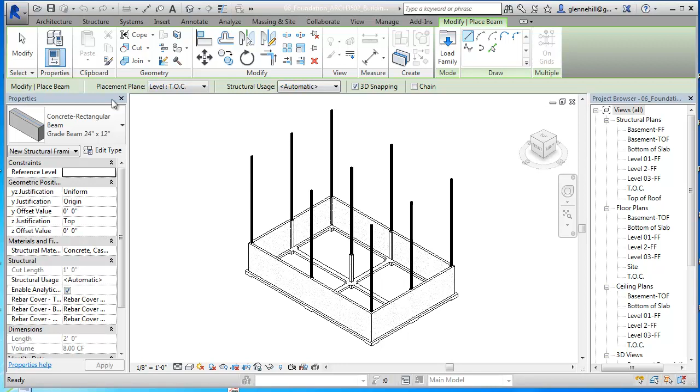To do that, we're going to go into structure. Once again, it's a simple beam, and we loaded down concrete beams earlier when we created our grade beam—there's two default beams in there, and actually 12 inches by 24 inches, that's probably adequate. We should go into Allen and Iano and check to see if the beam size matches what he would recommend, but we're going to take 12 by 24 and use that.

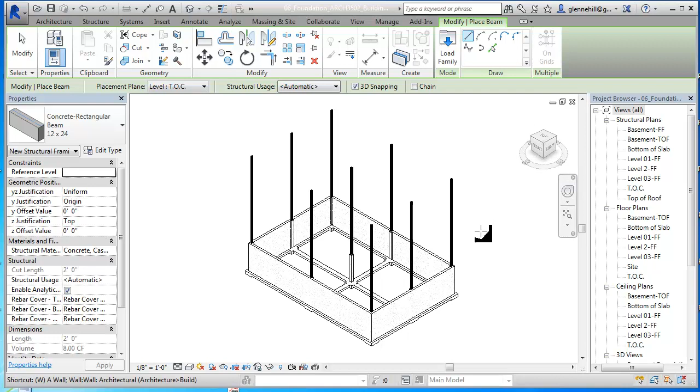Now let's WT this. Okay, I don't have any other views open. Since we're going to place the beams at the first floor level, I'm going to go into the structure, first floor, and we'll maximize this so we can zoom in. So here's the first floor. There's our grid lines, there's our walls. Okay, that works, and I think we're in good shape.

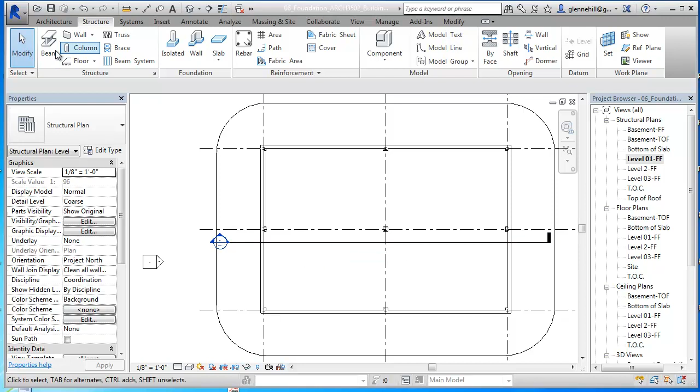So what we want to do now is put the beam in. We're going to click on beam and select that beam, and then we want to set the placement plane. We're going to set this not at finished floor of the first level, because we want it below the slab. So we're going to place it at... what would that be?

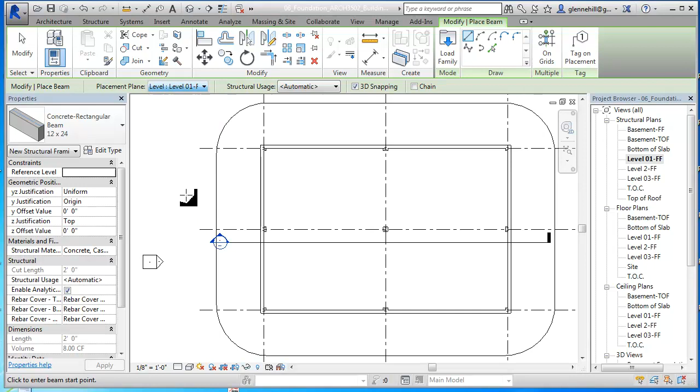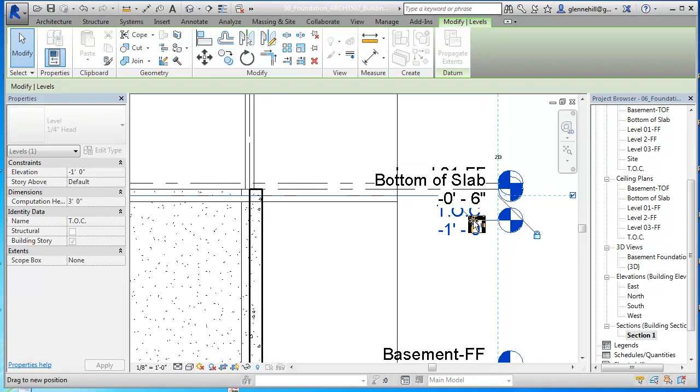I guess I better bring up a section. Hold on just a second so I can see. I'm going to close this out and bring up our section here so that we can see. So we want our beams, our slab—our labels are all messed up here, so I'm going to pull these down. So there's the top of the concrete, and there's the bottom of the slab, and that's what we want right there.

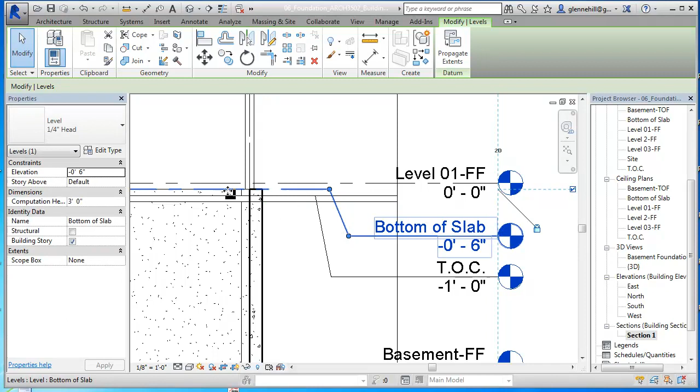So we want those concrete beams to go right there, to the bottom of the slab, right? And then right here you can see top of curb—I keep calling that top of column, but it's top of curb. And since I really don't want to see that, I'm going to go ahead and hide it, get it out of the way.

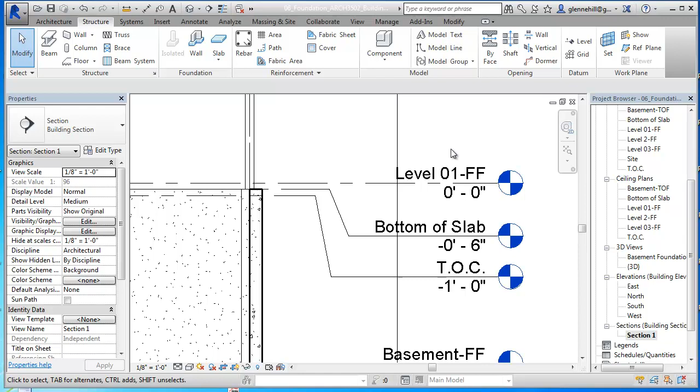That should work. So what we want is the beam to come right there, right to the bottom of what we put when we put the slab in. So that should work pretty well. So what we're going to do is WT out again, and we'll go over here, and I'm going to once again turn that off because it'll just get in the way, and we're ready to go.

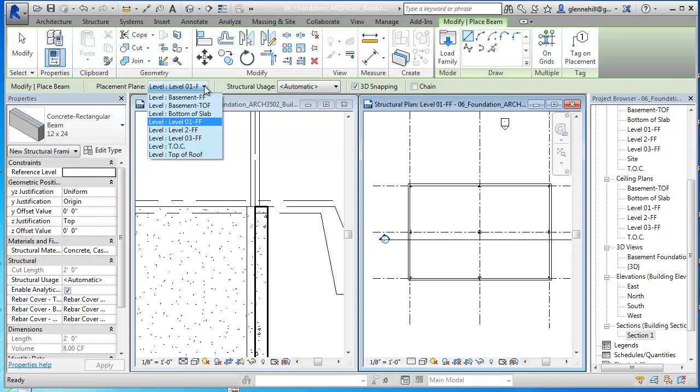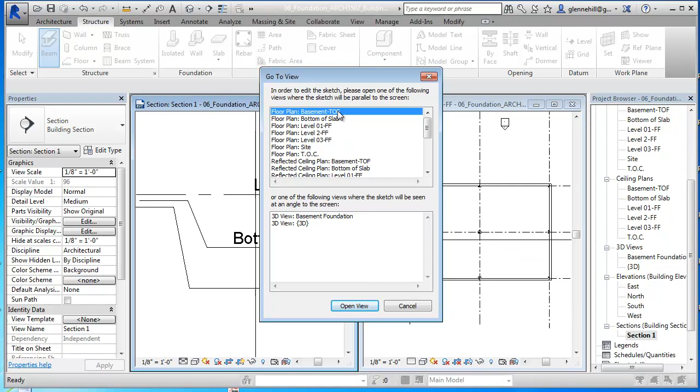So once again, back to beams, and we're going to set this to bottom of slab. Cancel out of that—beams, bottom of slab. There we go, so we're going to put that on the bottom of the slab. We'll say OK to that, in our finished floor view there. Wait, this should have been OK.

Let's cancel out of here. Let's get over here to this view and go to beams, bottom of slab. And since we're in a plan view, it wants to set beams in a plan view. It won't set them in a sectional view or an elevation view. It will set them in a 3D view though, if you wanted to put it in a 3D view. I find it easier to do it by plan.

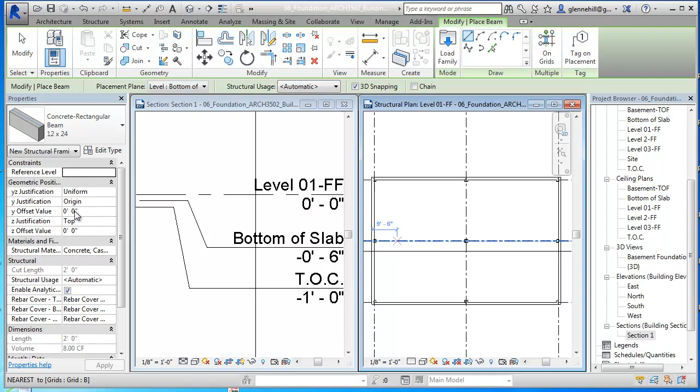So once again, here's our beam. It's saying it's going to set it by a Z justification of the top of the beam, so the top of the beam is going to be set to this level right here. And then there's no offset, so we don't want to justify it any. So that all looks good over there.

So we can just draw a beam in if we wanted to. We could snap to right there and then snap to right there and put our beam in, and I'm going to lock it into place so that if these columns move, it's now locked to those columns, and if either one of them moves, the beam will move with it.

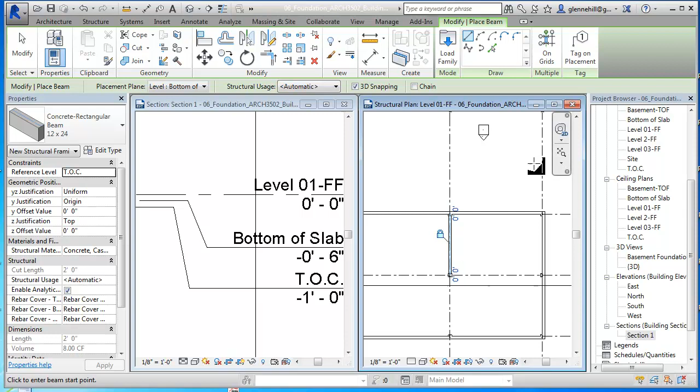The other way is to do it on grids. So if I click on grids, I can say, put a beam on this grid line right here. It went ahead and put beams on both sides of the column there—you can see them continuously. And then I can say also put a beam here. If we do here, I have to hold down the control key and go there if I want to select them both, and I can say finish.

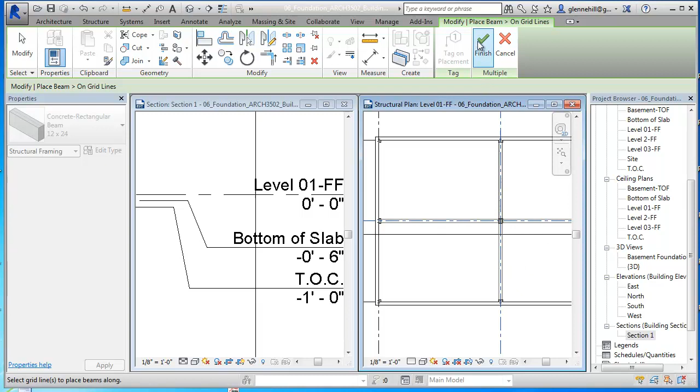And now I've got beams. Let's make sure that I don't have two beams here. So there's a beam—there's one, tab. Okay, so I do have two beams there, so I'm going to delete this one. Okay, good deal.

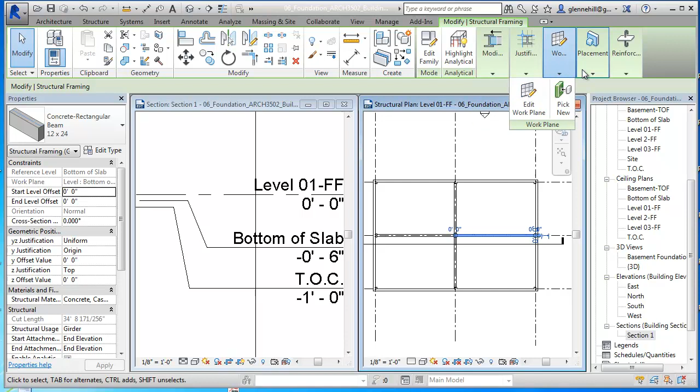So you can see there's modifications and justifications that I can do, different placements. I can put reinforcements in and stuff, but I'm not going to get into all that—that would all be about how I join this too. But for schematic design and concept development, we don't need that kind of detail. So let's take a look real quick at what that looks like in 3D.

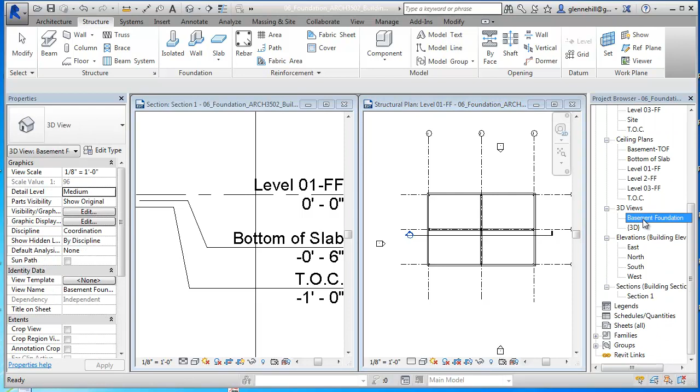So we'll just go to basement foundation view, and I'll zoom in here. And sure enough, there's our beams, and they're in the right location—they're right up here at the top of the columns. So when we put the slab in, boom, we're ready to go. The next video is going to be on placing the slab.